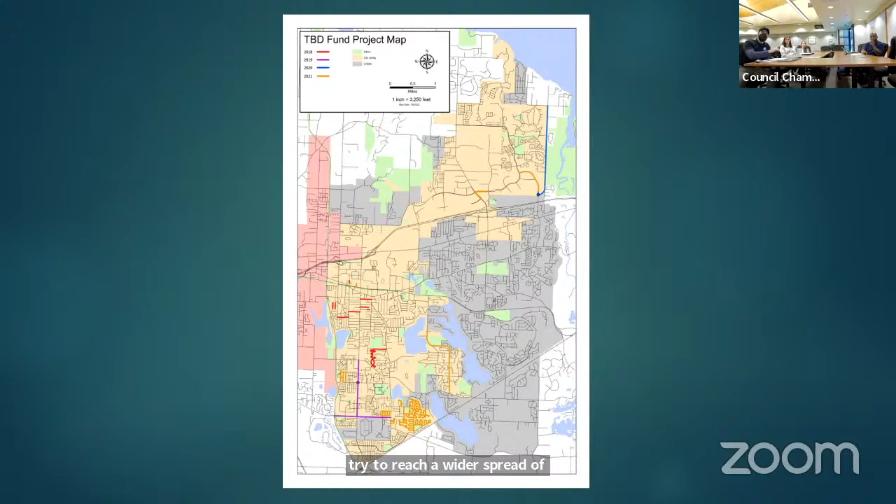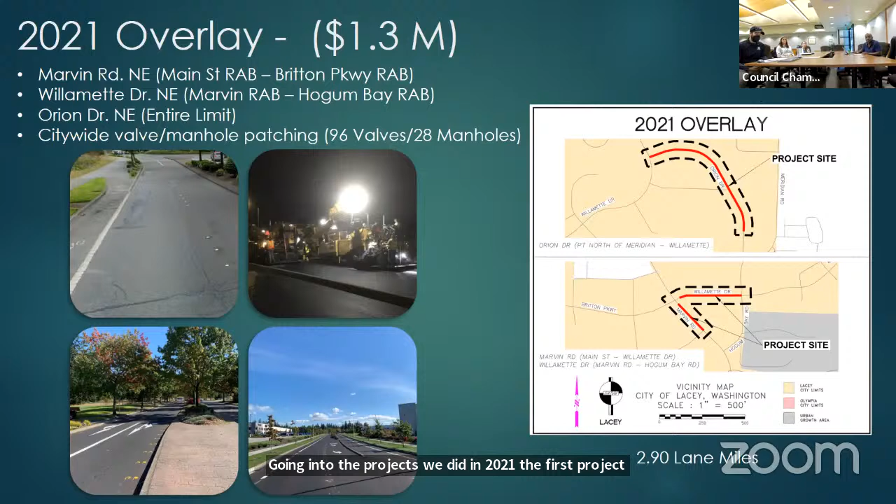Going into the projects we did in 2021, the first project here is the 2021 overlay, which was Marvin Road from the Main Street roundabout to Britton Parkway roundabout. Also Willamette Drive from the Marvin roundabout to Hogum Bay roundabout. It's over here. Orion Drive, the entire limit of the road.

And alongside that, we fixed a lot of failing valve and manhole patches throughout the city, which turned out to be 96 valves and 28 manholes. And we do that typically every year, baked into our TBD program. And these are pictures of the road before.

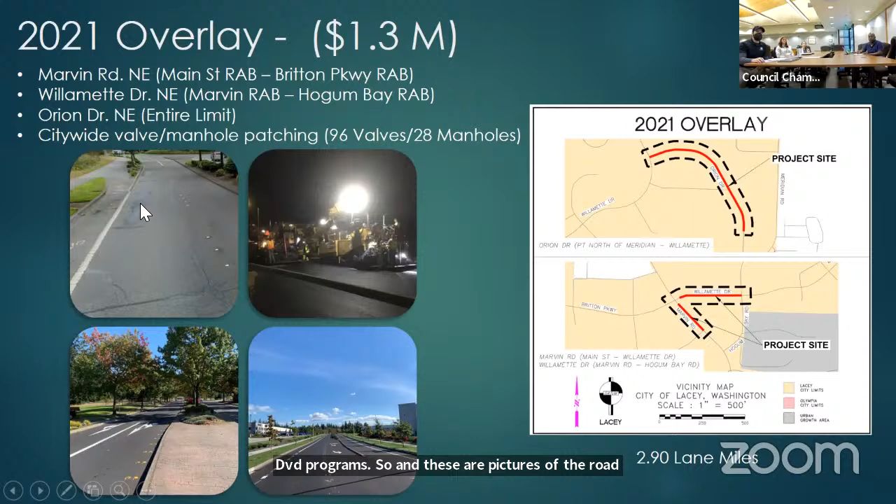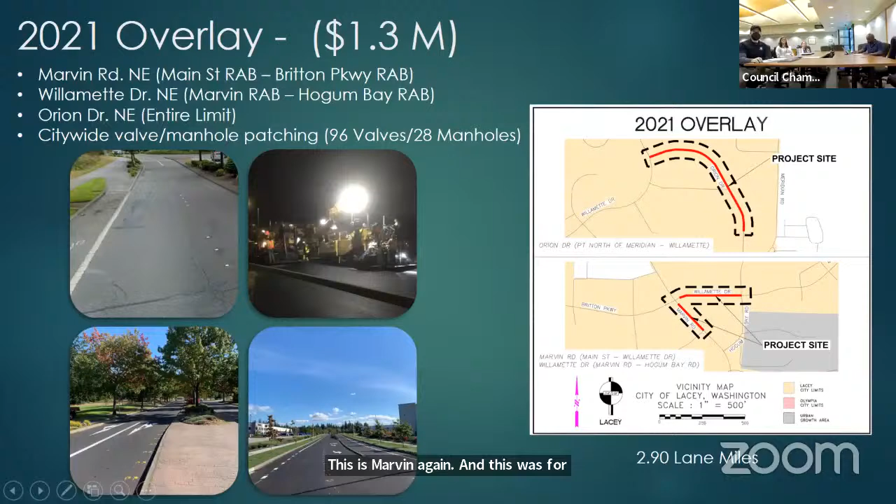This was Marvin. You can tell there was a lot of mastic put down. Our street maintenance crew was out there a lot trying to fix the defects that were showing. They were getting pretty elevated. This is the road being constructed and then the final product. This is Marvin again, and this was Orion. And in total, this was 2.9 lane miles.

Next project in 2021 was the Carpenter Road overlay. This was a Carpenter Road reconstruction from Mullen at the south, where the county finished their roundabout project. We matched into their limits all the way up to a little bit north of 26th Ave, where our city limits end. And this pavement was in very poor shape. As you can tell by the picture there, it was becoming unsafe to drive.

Obviously, the worst first approach in preventative maintenance isn't necessarily the best dollar for dollar, but when roads get this poor, you almost have to do them from a safety standpoint. So from an efficiency standpoint, doing really poor roads is technically not the best route, but you have to weigh in safety factors sometimes, and this was part of the case.

Now, on that project, the utilities department actually did something in conjunction with you guys at the same time, right? They did. We had a water line that went in, I believe, from about 33rd up through the county portion, and a sewer line as well. And then the utility will pay for the portion of the street that their utility is in. Since it was two utilities, they paid for the whole street there, because one would go on one side of the road, one would go on the other.

But if it was just, say, one utility like a water line, and they do one side of the street, they would be obligated to pay for that half street, and then TBD funds would pick up the other half of the road. Or if it was a 3-lane section, TBD would pick up 2 lanes. So that's how it goes with utility projects conjoined with TBD funding.

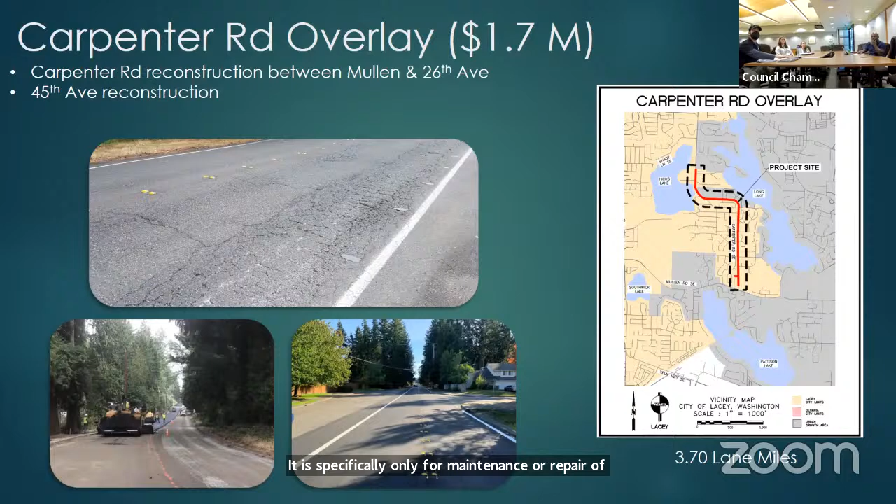Moving on to another 2021 project was our Slurry Seal program. We slurried many neighborhoods near Yelm Highway and Ruddell. They included Emerald Heights, Lake Hills, Thornbury Meadows, Sunset View Estates, Pattison Park, Strawberry Fields, Echo Glen, Sterling Pointe, and Lakepointe. This accounted for 152,550 square yards of type 2 slurry and about 14.88 lane miles in total.

The key thing to note here is with the slurry, it costs a little over $2, like $2.25 per square yard of application. And a complete rebuild of a residential street will cost you about $26 a square yard. Might be a little elevated now based on material cost too.

So when you see roads with minor defects start to form, slurry would be a cost-effective option to try to buy a few years of life in your road before you have to rebuild it. So you're not necessarily putting off construction, but you're delaying construction and saving money by doing that delay and rehydrating the surface, giving it a better friction course.

Yeah, I thought it turned out great. I got my car off the street in time, you know. Some of the slurry did end up in my driveway, but it washed away really quick.

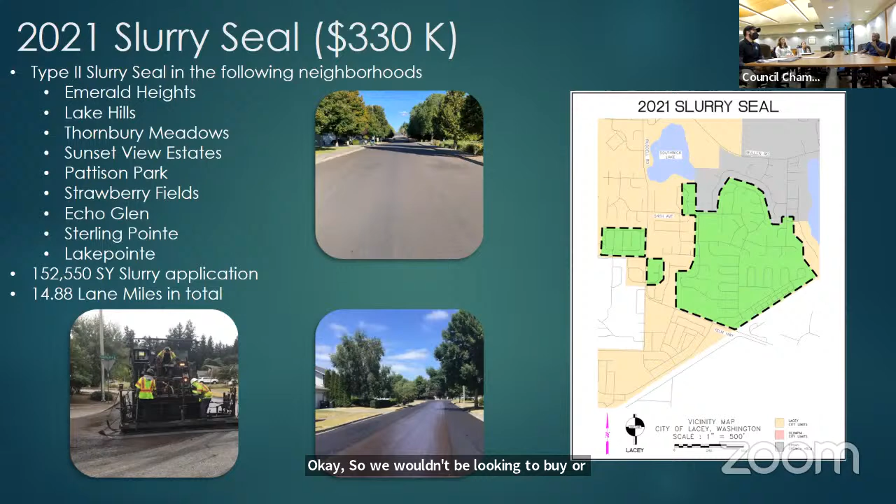Alongside the road work done in 2021 with TBD funds, the city did 2,120 square yards of sidewalk panel repair. And that was joined between the 2020 project that carried over into 2021 and part of the 2021 project that's going to carry over into 2022. So you'll see the 2021 project in the 2022 report because it'll use funds from that year's TBD.

And the sidewalks done would be in the Avonlea neighborhood, phase 1 and phase 2, as well as Alhadeff and 10th Avenue near Pacific and the golf club roundabout. 2,120 square yards of sidewalk repair is about 765 5-by-5 panels, just to give you a scale of how much sidewalk was actually done. So it's quite a bit. Mhm.

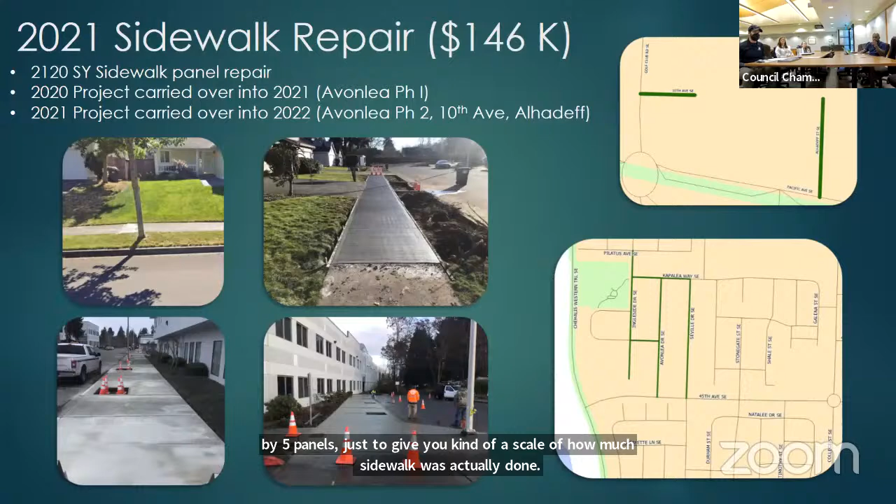In summary, in 2021, we spent about $4.1 million of TBD funds, used 19,360 tons of fiber reinforced pavement, put down 5.8 miles of striping, a little over 9,300 raised pavement markers for enhanced visibility. Can we go back to fiber reinforced? Sure. What is that? It's an additive you add to HMA to make it bind together a little bit better and resist early onset cracking and rutting.

So what they do is they're almost like clumps of fiber, an aramid fiber. Aramid, it's the same material used in Kevlar vests. And so it helps the tension of the asphalt. They say it can increase the life expectancy by like 40%. Nice. Is it sort of like putting straw in brick? Yes, it's definitely something that holds it together.

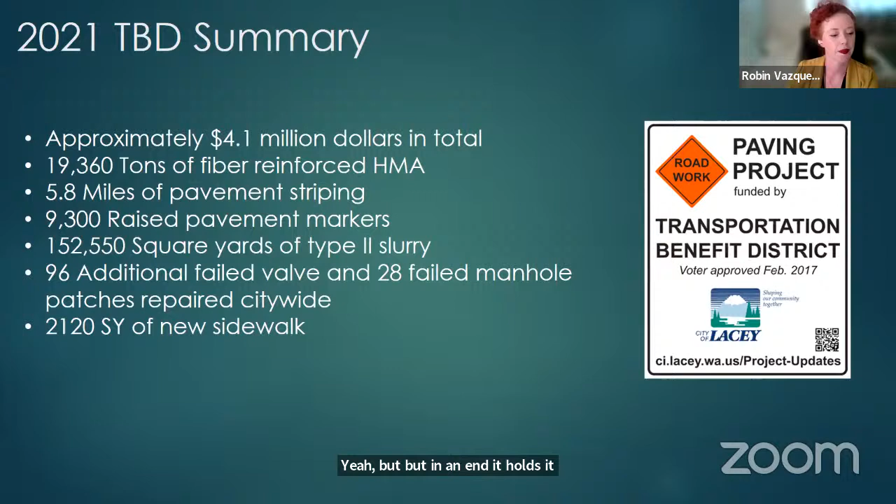And so we actually have an unfortunate, but real life experience with this out on Hogum Bay Road. I don't think you guys were here when this happened, but we had a water break on Hogum Bay Road where we had just finished installing this fiber reinforced asphalt. Normally when you'd have a water break, the damage would be more localized. In this case, it lifted up the whole entire mat of asphalt for maybe 300 feet down the road.

And they had to get in there with a jackhammer, and it was quite difficult to jackhammer that area out and remove the asphalt because it had just been installed. So it's really tough material. So were you able to extract the water and preserve it? No, we had to end up replacing about 300 feet of roadway with that water line break that happened. But the material itself is very strong, really great material.

We've been using it since about 2015 or so, and it's fairly minimal cost when you look at the overall cost of the material. We're seeing somewhere in the range of about $10 per ton on average. But the testing is showing that it's increasing lifespan by 40%. So the cost to value ratio seems like a pretty great deal. Nice. Okay. Yeah, especially on highly traveled roads that see a lot of traffic.

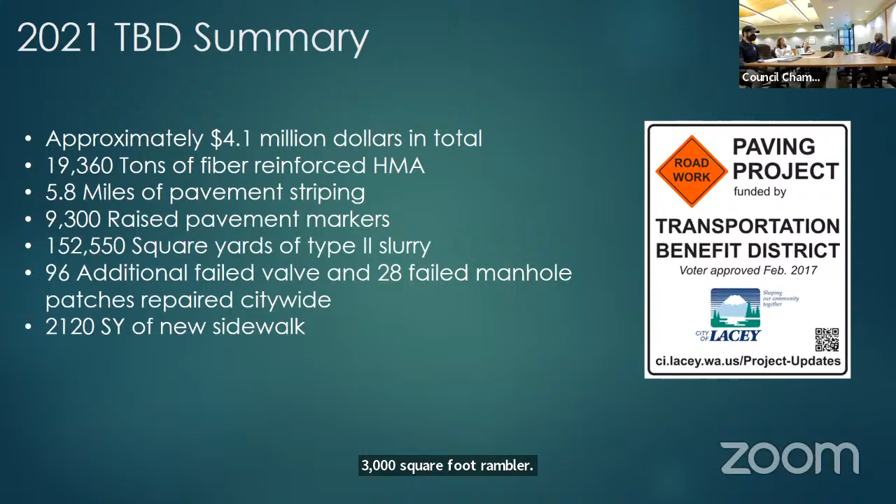Yeah, okay. When I do construction loans, people are always surprised at how much the concrete for the foundation costs. Exactly. And they go from wanting a 3,000 square foot Rambler footprint to, well, maybe we can have a 2-story. Kind of a vibe sometimes. Very similar.

So what's the plan for diverting the water, the aftermath of the water over the roadway for however many days we had that? We were talking about how we're not sure if there's a place for that water to go. How do we prevent this from happening again? I can respond to that. Okay, go ahead. Yeah, so in terms of water flow, you have to look at both your upstream and downstream channels. And downstream is incredibly flat. There is no way to prevent this. It just is what it is. It only happens about once every 10 years.

So in terms of the cost of rechannelization and all the environmental impacts that would go with it, there's not a cost benefit there. Well, it's really not feasible. And if you wanted to consider doing it, in terms of cost benefit, it would not rank anywhere near a priority. Wouldn't make the list.

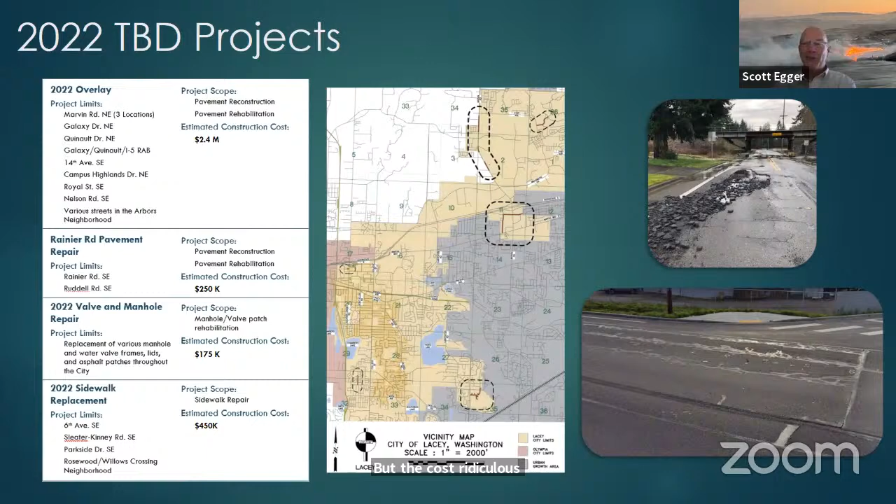Yeah, bridges, channels, and streams were my life for quite a few years, so this is something I know a lot about. Yeah, okay. Maybe it'll work itself out sometime in the next 20 years. We'll see how that goes. Continue on. Maybe we won't have as much rain.

We'll cross our fingers. But with the overlay program, we're gonna cover 3 sections of Marvin Road, Galaxy, Quinault, and the I-5 roundabout, 14th Avenue, Campus Highlands Drive, Royal Street, Nelson Road, and then a portion of the Arbors neighborhood. And the estimated cost of that is $2.4 million.

As we were talking about the Rainier Road pavement repair, where the rainfall flooded the roadway, it ended up pumping the road and removing our top lift. Our street maintenance crew was on it and put down a good patch that's holding up. But we have to get something more permanent out there to fix the problem, fix in air quotes, because if this happens again, it might just open up eventually again. But we're trying to mitigate that with the best practices available to us.

Sure. Gotcha. And as I said before, valve and manhole repair. This is a yearly program going out and repairing manholes and valve patches across the city. More sidewalk replacement at 6th Ave, Sleater Kinney, Parkside, and Rosewood Willows Crossing neighborhood, and that comes out to be about $450,000 of sidewalk. So these are projects that are going on right now, or that are going to be done by the end of the year? Both. They're about to start. Yes. They've all been awarded and we're in the process of executing contracts on all of them.

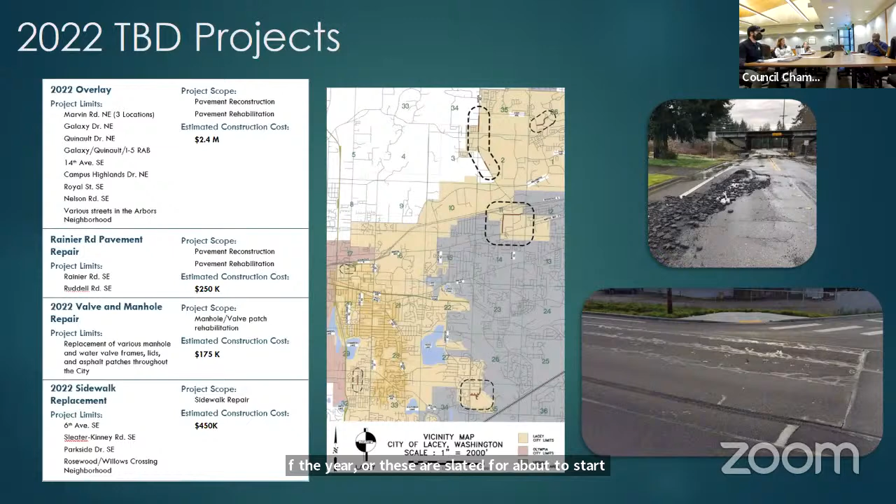Gotcha. And that's a good question because going into the next slides are projects that got delayed due to material shortages where they're not out to ad yet. So the dollar values on them are a little speculative. But one of those projects is another portion of Carpenter Road from Woodland Trail down to the end of Ruland's property, our right of way limit. This was supposed to go out in spring, but there was approximately a 6-month delay on the pipe because there was a water line that needed to go into Carpenter before we do the construction, because doing it the other way around is not standard practice.

And where are Pacific and Martin in relation to that? Pacific is right here. Okay, so that is what I'm thinking of. Oh, okay, so that's the bus barn area that we talked about earlier this year. Down here. All right, got it.

So we want to avoid the situation where we have the 6 months delay and then we're trying to pave in December. Right. So that's why we're gonna hold off on advertising this until probably October. Yeah, I remember you saying at one of our meetings that this will preferably be a next spring project. Mhm. That helps give the contractor a better idea of what they're looking at too, where if we sent it out in spring and there was a 6-month delay on pipe and they wouldn't know when they get it, they potentially have a high pipe cost in their bid.

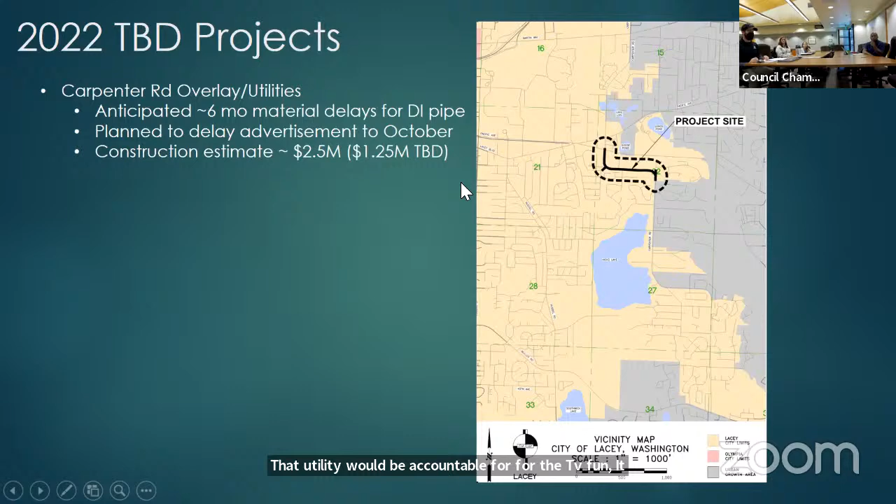Okay. Are you guys finding any place where we're not having a supply chain issue? Is anybody fully back online? Paving? I mean, costs are high, but they're not having issues getting the material. Okay, all right, I'm just trying to keep my eye on that. Yeah, paving and concrete are about the only two materials that we haven't seen issues with getting the actual materials. But that's not to say there's still not issues with contractors finding time to do the work.

Well, yeah, there's always that complaint right now of just a shortage of workers and people to do the work. And the late start to summer too, where everybody got their papers out at the same time. Right. So all the contractors are scrambling to get crews together and they have to jack up their prices. Sure. But across the board, anything with steel, so anything in the water or sewer, types of pipes, those materials have to be made in Kansas or whatever.

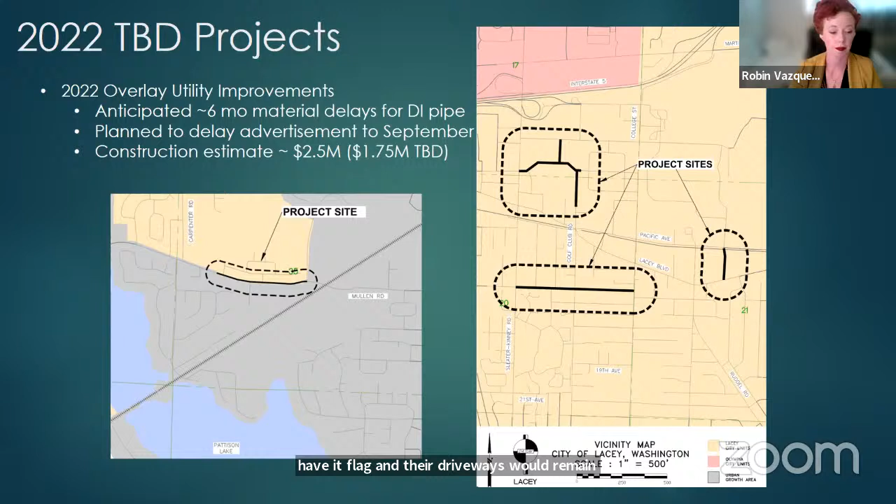Is the work outside of the bus area gonna interfere with bus service? We would be required to maintain access for them. So during construction, the roadway may be torn up, but we'd have it flagged and their driveways would remain accessible. Okay, thanks. You're welcome. And then the timeline on a project like that is days, weeks?

For any particular street, they could probably get the street in front of the bus barn ground up in one day and maybe paved in another. But we'd have to look at the area, and if we're not in a residential area, sometimes we'll do that work at night. But we have contacts within Intercity Transit, North Thurston School District. So whenever we're paving in areas like that, we work closely with the stakeholders around the area to make sure we're not impacting business or bus routes or things like that.

So it'll likely be weeks of disruption though, with utilities going in first and patching and shutdowns before the paving. Right, the paving portion itself usually goes pretty quickly, but the utility work will take longer. The good thing about that portion is there's no utility work in that segment. It's over on 7th from about here to Slater Kinney. So that should be quick work. Okay. Construction estimate on this project is about $2.5 million with 1.75 million of that being TBD.

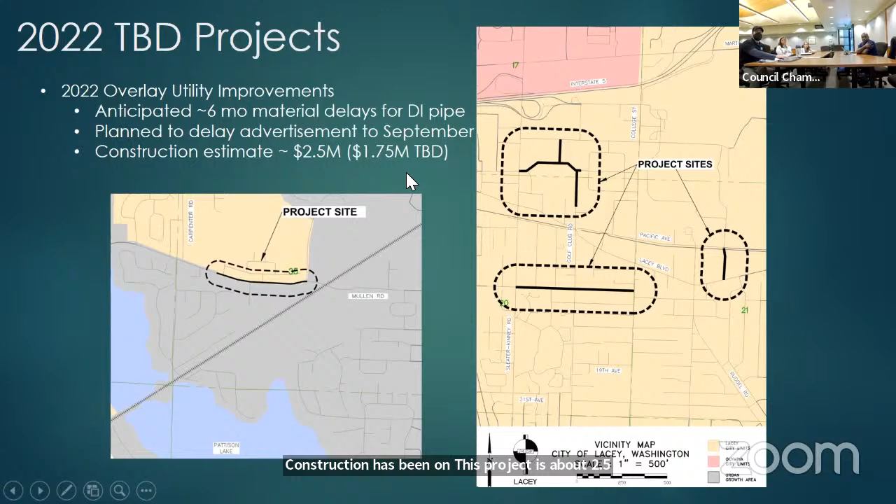Beyond 2022, looking at everything 2023 to effectively the end of this 10-year cycle of TBD, is this map over here. The projects in blue are projects that we have selected to be repaved in 2023. Some of them have utilities as well, such as down off of 33rd Ave and 33rd Loop and 36th and the courts down here. There's a water line that goes into that. So part of the roadway would be covered by the utility itself, but TBD funds would obviously pick up the other half of the roadway.

In our 2023 plan, we have the Britton Gateway Roundabout, Rainier Road, a little portion of 70th Way, Ballustrade Roundabout, and 66th. 33rd Ave, 33rd Loop, 34th Avenue, there's a sunken portion. We're looking at fixing 36th Avenue and the 5 cul-de-sacs off of it. Emerald Hills neighborhood down by our slurry seal, down towards Yelm Highway and Ruddell. 37th Ave and Lakecrest, our street maintenance crews are having a tough time holding together 37th Avenue, so we're gonna patch it up for them and do the neighborhood nearby. That pavement is starting to fail.

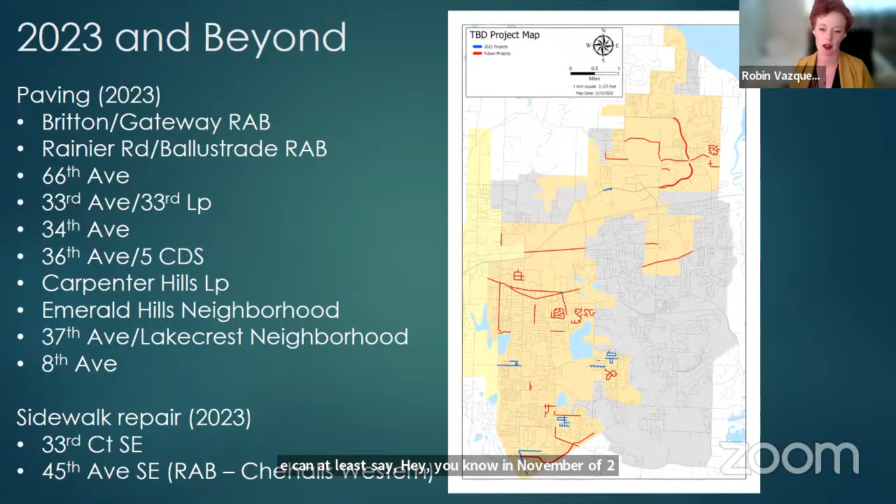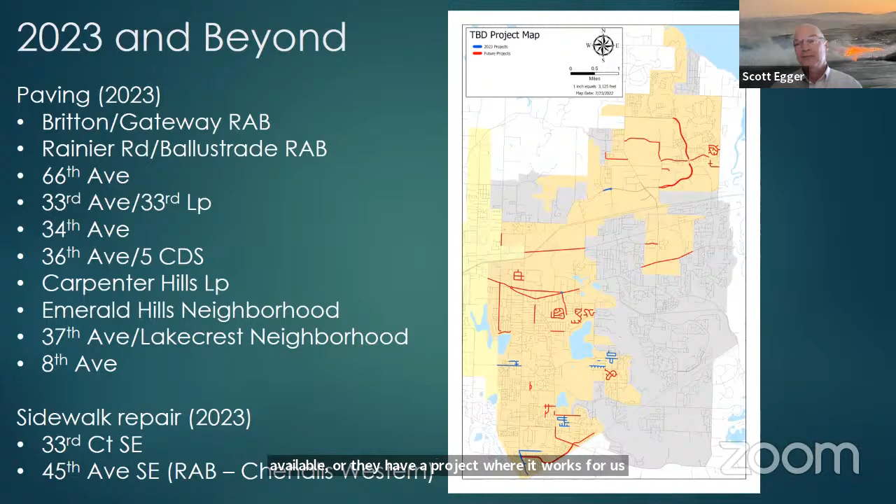Now, with that said, we have coordinated with Thurston County. We coordinated with them on the Carpenter Road overlay last year. So we do that. If they have funding available, or if they have a project where it works for us and we have funding available, yes, we do coordinate. Okay, that's helpful. Thanks. Yes, for example, last year on the Carpenter Road project, there was a portion of Carpenter Road that we actually paved for the county, then they reimbursed us for their portion of those costs.

So yes, I'm sorry, I misunderstood, but we do coordinate with them in those types of situations just to make sure. And sometimes it's vice versa, like there's been other times on Carpenter Road where they were doing some patching work and they'll come do some patching in the city and we reimburse them. So we do have an interlocal agreement with Thurston County for work like that.

You know, there's a development, a new building right there on Martin Way, just past Carpenter Road, right next to, I think, a property that Councilmember Stedman owns. From what I could tell, the county had them pour a new sidewalk there and really update that frontage. It looks like they're trying to line up with our standards a little bit more than they were before, just like in front of Winco. I think that's how the theme is trying to be carried out, but the study is going to help solidify that all across the spectrum.

In addition to that, a lot of the major thoroughfares like Martin, Pacific, Lacey Boulevard, the Couplet, Steilacoom, Yelm Highway, Rainier Road, there's other avenues of funding those projects too. We could get grant funding for a lot of those streets. That's the reason why we typically try to patch them instead of doing a grind and inlay or rebuild on those, because there are other funding avenues, a federal grant or something of the sort, that would pay for that.

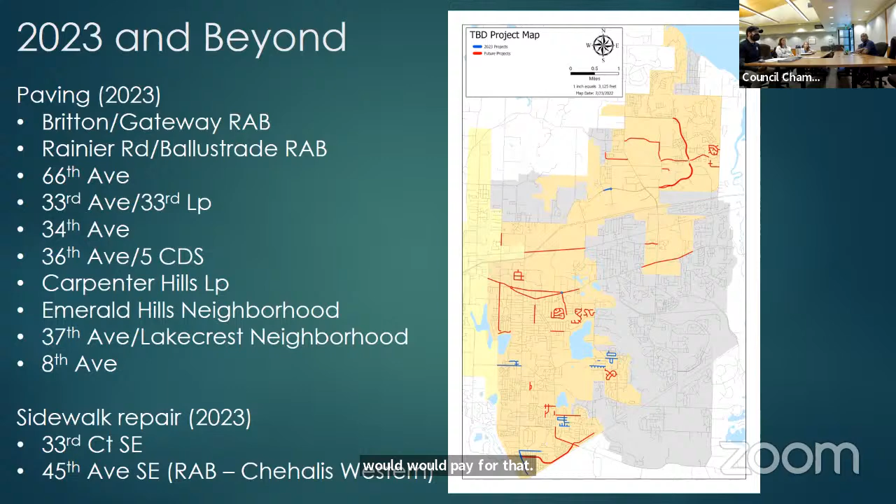All right. And with that, that is the end of my presentation. So if there are any more questions, feel free to ask.

Yeah, you can stop sharing your screen, and there we go, we got everybody. Hey, Mike. Okay, so does anybody have any?

I don't have any questions, Malcolm. I'm pretty familiar with most of the projects, and have the highest faith in the public works department, especially when it comes to our roads and our transportation. They do a great job. Testament to your guys' work.